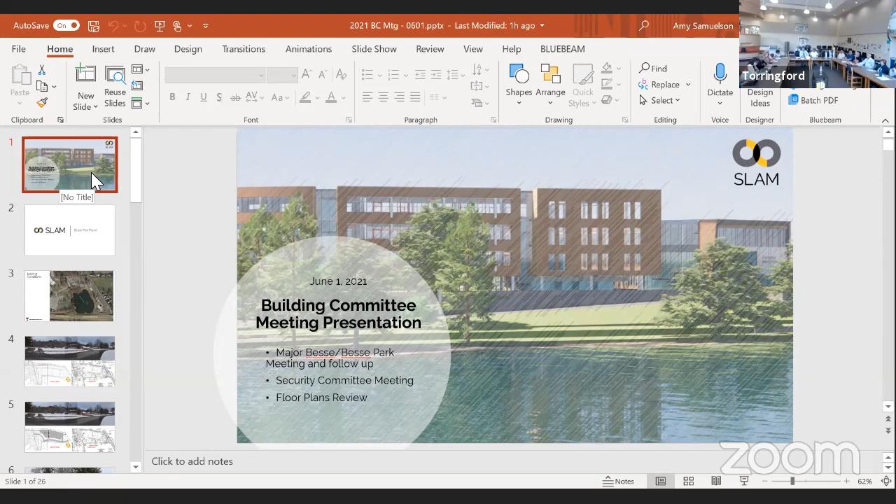One of them's playing music. Oh yeah, I have this stuck in the screen. Okay, well, let's see.

So today's agenda is to recap what we've been doing as a design team for the past couple of weeks. I believe the last time we were here, well I was remote, but Kent was here and he gave a debrief of the meeting he had with the mayor.

There has been some new information since then, and I don't know if Kemp has joined us. He's not yet, he's in limbo, trying to get into the meeting.

So I'm going to skip item 1 on my agenda. I'm going to go to the security committee meeting, and then we'll do a floor plans review, and hopefully Kemp will be in by then.

So last week we had a meeting of the security committee for this project. I'm not going to go into too much detail on decisions made - in fact we didn't really make a lot of decisions. It was mostly informative, and decisions will be forthcoming in the next few meetings. But it was a good start to understand the requirements of the SSIC.

That is a document produced by a group after the Sandy Hook tragedy in Connecticut. I say in Connecticut because it only applies to Connecticut schools. I've been to many national conferences, and I'm always surprised that there are only 2 states in the whole United States that still have security guidelines for schools.

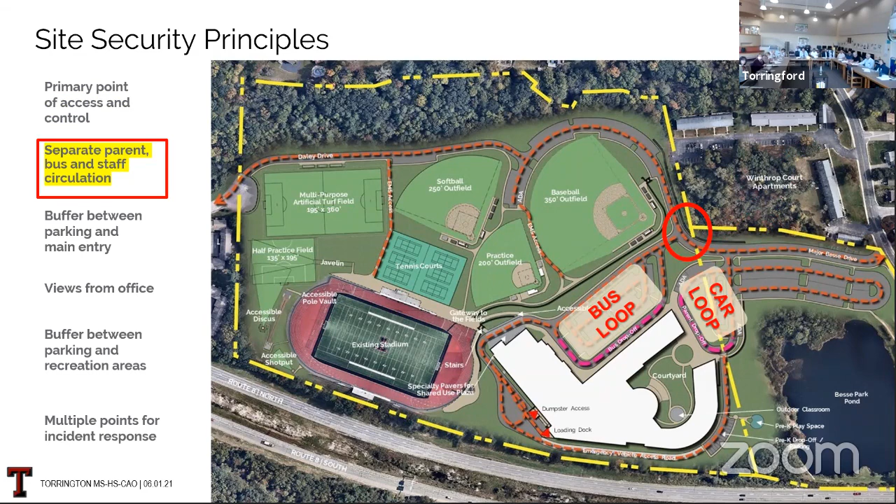Providing a buffer between the parking and the main entry is another line of defense. We haven't shown them in our renderings yet, but we'll have concrete bollards, benches, and other site plantings that will protect your entries and not allow cars to breach.

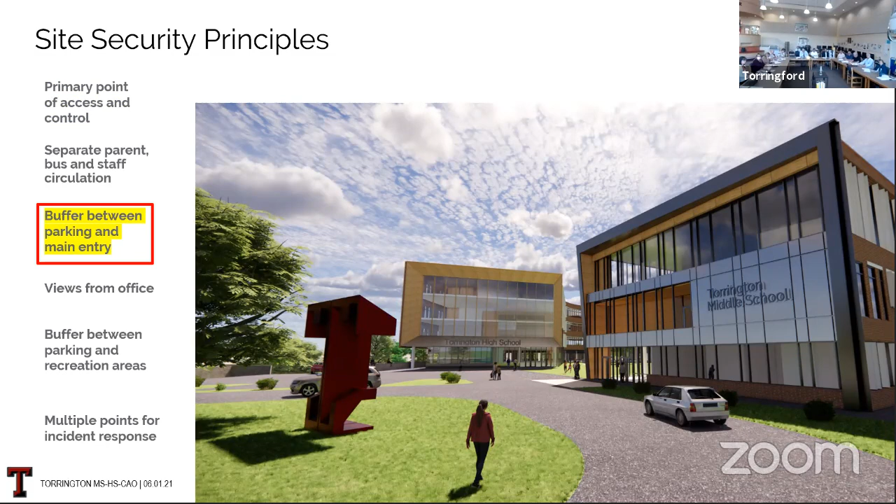That last slide, as well as this one, really demonstrates the views you'll have from the offices. The main entrances really do have all eyes on the entry from Major Besse and the parent loop, because we will not allow any parking right against the school building for a few reasons. It's a fire lane, so if any car is parked there, that's a first sign something's wrong—nobody should actually be parked there. And we'll make sure people are visible as they're walking toward the building.

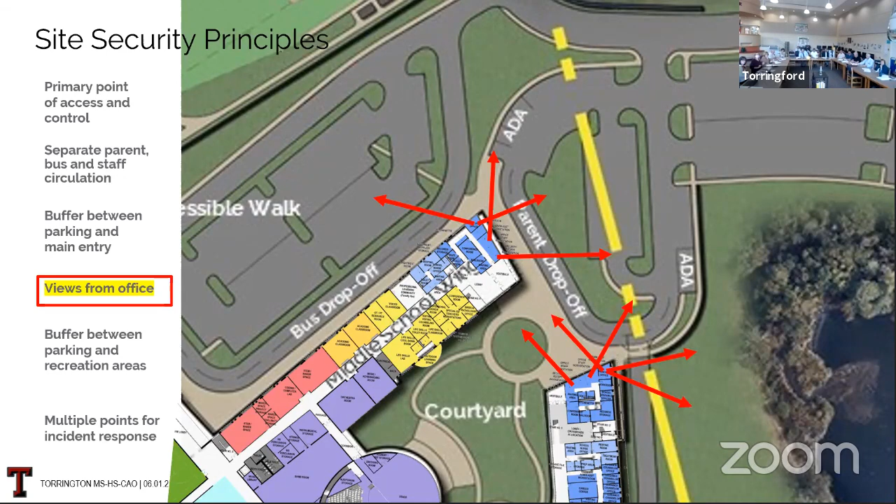There's a recommended buffer between parking and recreation areas in most cases. This is really a recommendation we're very conscientious of for our elementary school designs, so that playgrounds are not without fencing and out in front.

But in this case, we do have a retaining wall. That parking lot where the bus loop is will be below the level of the fields, just because of how your grade is on site. So those fields are sort of up where they are now and toward the back of your existing building, which is higher than where the entry is.

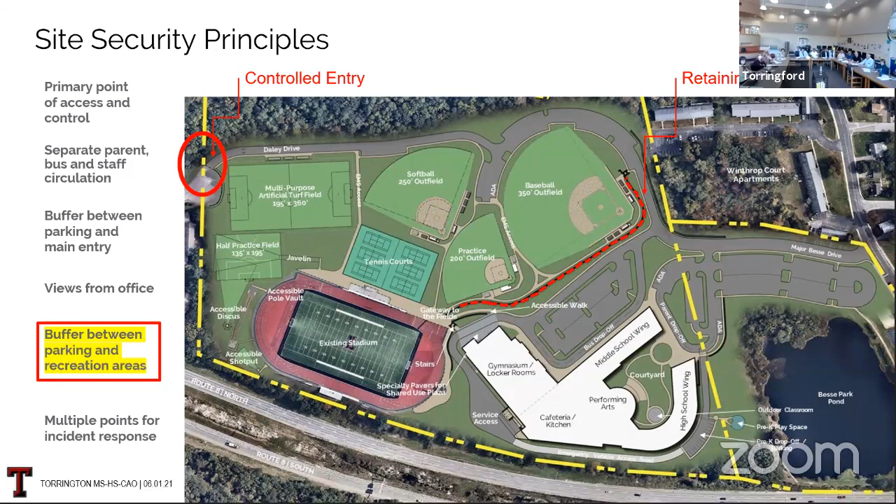We didn't talk about the extent of perimeter fencing at the security meeting, but that's another decision that will be made at that meeting, because some of your school property is already fenced. So how much of that can remain, what parts do we need to replace, and what do we need to put in new?

While it's very important to keep as few doors as possible for entry, for just controlling who's in your building—and we'll go through an entrance example in a moment—we do want to make sure there are multiple points for incident response for fire and police when they need to attend or come to the school during an incident.

So in yellow, these are what I'll call the minor doors. Those are egress doors, and they're either at the bottom of a stair or near an assembly area like that auditorium, where the public, in case of an emergency, will need to exit. Those will also be available for entrance, but only for first responders.

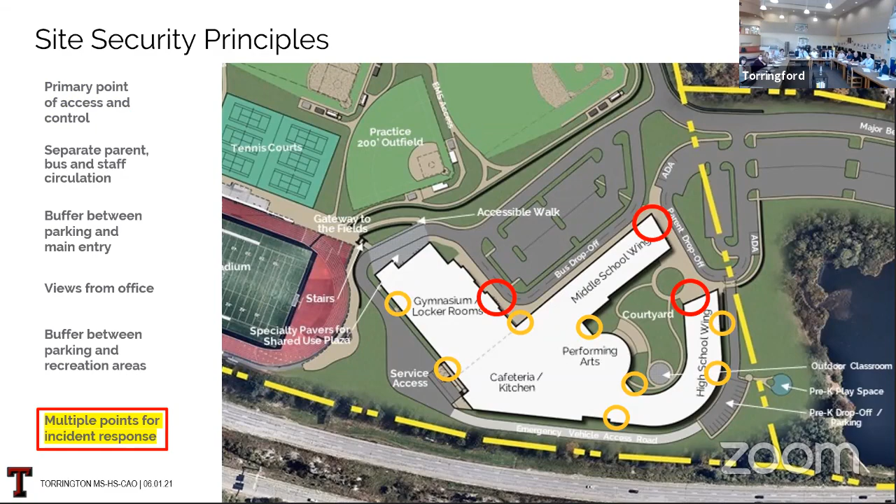This is an example of the entrance to the high school. Your middle school will have a very similar locked vestibule, so anything I say here really applies to both main entrances for this building. We're going to have this one location available for visitors during the day. The only exception is visitors will also be able to go to the central office door and be buzzed in by a different person.

Here at the school entrances, there will be a buzzer or button outside, a camera, and the person sitting in the main office will be able to see who it is and let them into this vestibule. The vestibule is still then locked, and there will be an exchange of credentials.

There's going to be a pass-through window, like a teller window, where the person manning the desk will check in with the visitor, get their ID, badge them, provide them with a lanyard—however you normally allow your visitors in, maybe it's a sticker. Then that person will be buzzed either into the building, if there's someone familiar with the building who knows exactly who they're going to meet, or the person they're meeting meets them at that door. Or they'll be buzzed into the waiting area and sit here and wait for their next meeting, or wait for their student. So it's going to be a two buzz-in approach with a credentials window.

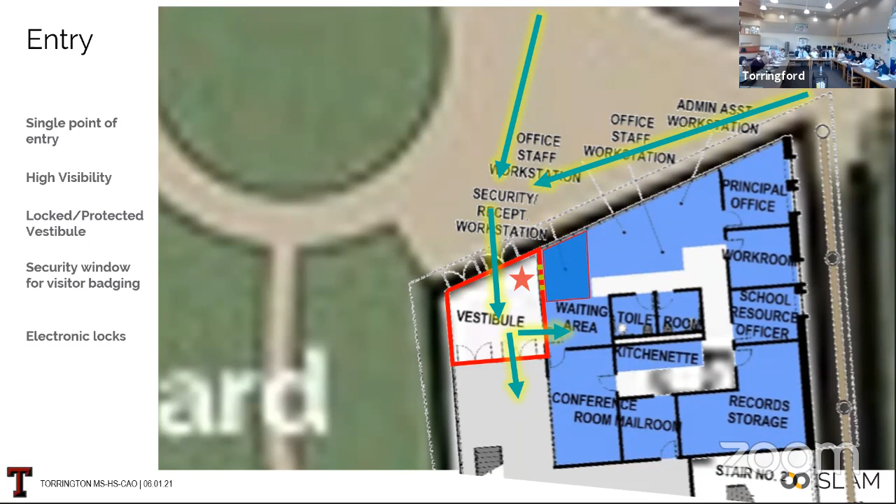We then ran through information about the security cameras and surveillance, something Allie and Ed and others are working on with our security consultant. Also, because the district would like similar facilities at each building, you're looking at a new system district-wide.

That's security cameras and access control. We also talked about card reader or fob entrance credentials, and how those can be used at multiple buildings, or perhaps first responders' key fobs to their police department could be given credentials to open a door at one of the schools, if you choose.

That will all be on a timer and able to be controlled from a computer. You can allow or not allow someone to use the door, or allow them to use it between certain hours before it gets turned off. It's all controlled, but can be set up at first to not be manual.

At certain times you might have the entrances unlocked. In the event of a basketball game, the entrance near the gymnasium might be unlocked even in the evening, or for a band concert. During the day, when buses are coming or parent drop-off is occurring, those doors will also be electronically unlocked.

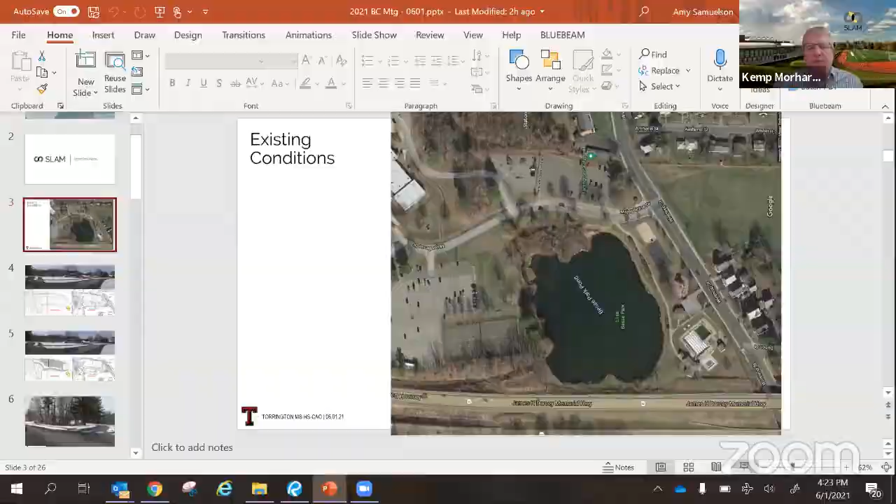Good afternoon, everyone. The developments we heard at the initial security meeting were that the police department would not support the relocation of the Major Besse Drive. That was news to us at that meeting, and I think others were a little surprised by that position, but it seems to be a firm final position from that office.

So we will have to redevelop this portion of the park to integrate the existing drive with the required parent drop-off and the drive along the east corner. We'll be working on that over the next week or two and have something to show at the next building committee meeting.

I put this photo in because I didn't have the benefit of seeing the meeting the other day, and I don't know if you ran through it at the time. When you come in, you can see by the snow in the background there is a real knob that previous iterations of the driveway must have worked around. Unfortunately, that exists sort of where we'd like to have the car parent bus loop, drop-off loop, and parking for visitors. So that's just something to contend with as we move forward and redevelop the site plan.

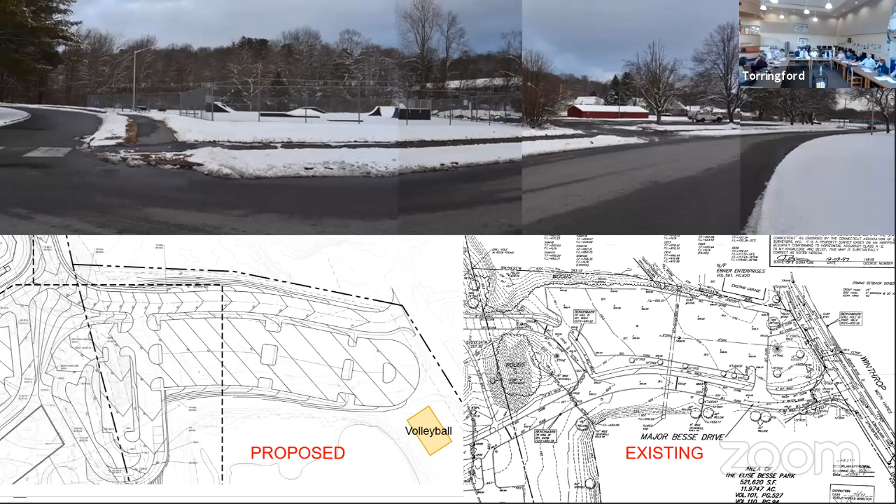The other issue was that in inclement weather, they didn't feel they'd be able to brake coming down the hill as well as they can now. That's why we asked them for their report. It was no fooling around - it was no, yeah, that was it, John.

That's enough to make me think they're not very secure about what they said. And if you listen to the makeup of that committee, it was handpicked by people who are going to tell them what they want to tell them. So I'm with Fiona, I think it smells bad.

Well, we will be doing our own traffic study as well, so we'll have a second opinion, if you will, in a few weeks. I think your traffic study is gonna be much more in depth as to what those UConn numbers are made available to. I mean, I could look those up. They're strictly just traffic counts at the stop sign. I don't think they really looked at the slope all that much.

They didn't have any plans at all to go one way, so it was a quick decision. Chief Baldwin was pretty sure what he wanted, and I'm sure the traffic enforcement officer was opposed to it right from the start.

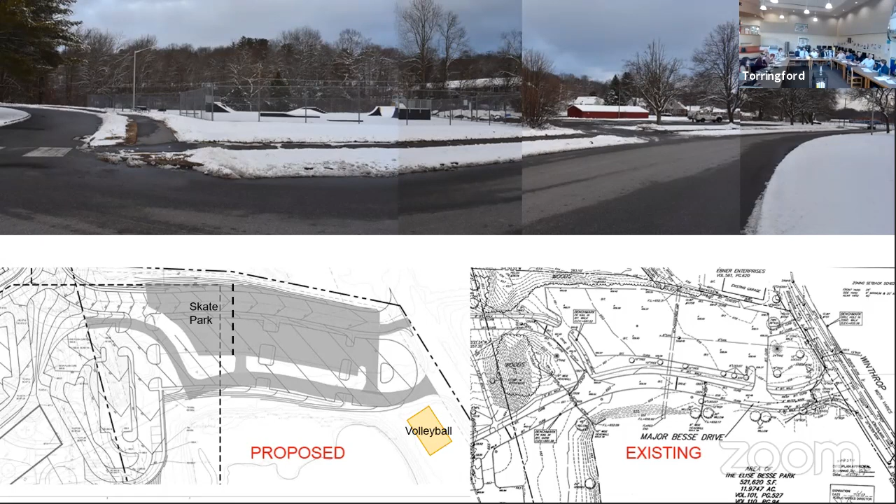I did request it. I can request it again after another week or so, just as a reminder. Yeah, I was gonna ask you if you had gotten it yet. No - great, thank you. I will also call the chief tomorrow.

So I thought we would just run through the building plans that were in the schematic design narrative, and do a little deeper dive than what we've done at other meetings with this group. Sue and Robin are sick of it now, probably - we've met so many times in recent days.

Here's a reminder of the site plan and fields layout. And then moving on to the first floor plan. Starting at the entrances, I'll run through the high school first.

At the high school entrance, there's that locked vestibule that we just discussed, and there's a main office function with a conference room and some offices. In slightly lighter blue, this is the nurses suite. And then back to that same blue color for administration, you'll see a series of offices and a suite here with its own two little entrances - that's the guidance department.

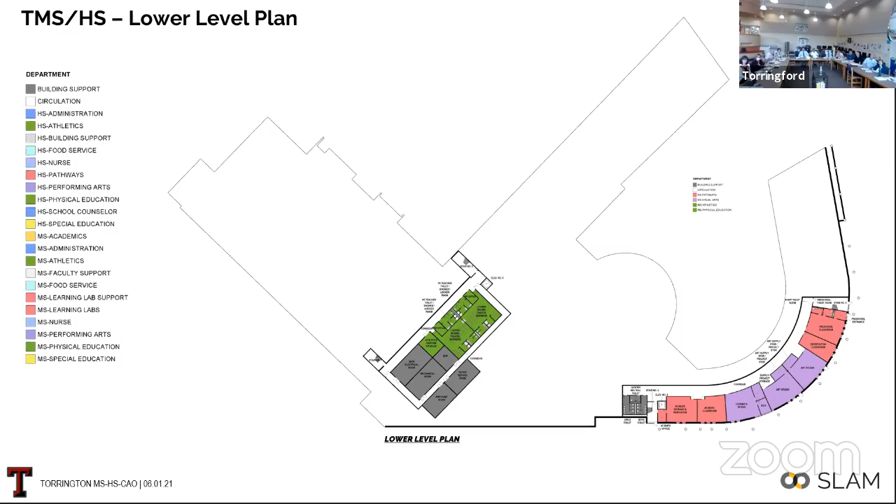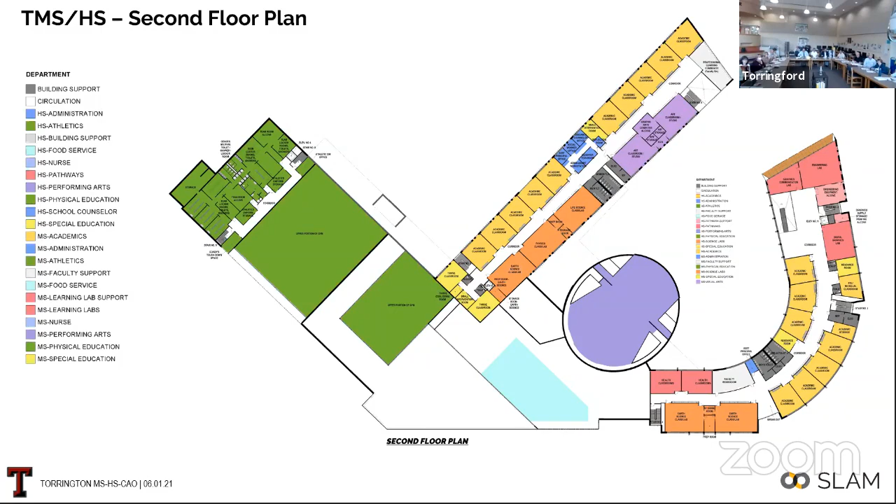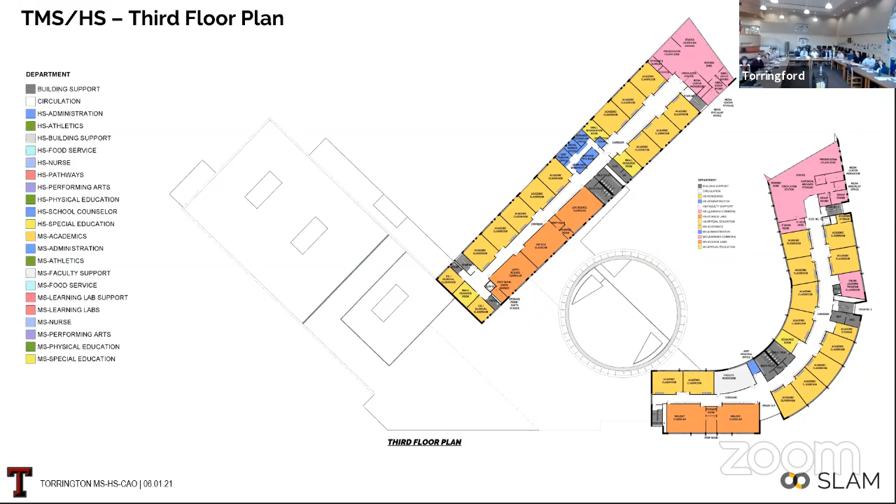I think that is all. If there are any questions about the layout, I'm happy to take them. We are in the process of really fine-tuning what's next to what.

Just curious, how many elevators are going to be in the building? Four elevators total. There are two-story elevators, 2-stop elevators we call them. One will serve the locker rooms at the high school side, and one of those 2-stop elevators just serves the lower level academic spaces on the high school side, allowing for handicap accessible access from the high school wing down to that level without going outside and parking in that separate area where the pre-K is.

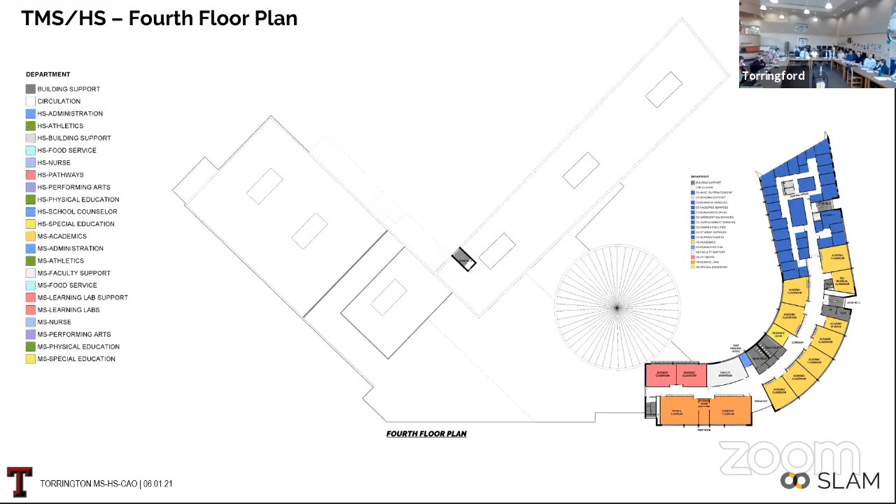Just one thing back to the site - I know I brought this up before, but now that you may be running out of parking, the cheapest parking you can put in is up against that slope, up near the fields. I don't know if you're going to use that or not, but it would be a heck of a lot cheaper than scrambling for somewhere else.

Right, and we certainly did add a lot of parking here. Correct, and if needed, if we end up with less at this end, yeah that's the cheapest I think. We don't want to have to cut into that slope if we don't have to, but the retaining wall's not that bad if it's only 4 feet. Exactly, just tow-in parking, and I think that'll get heavily used on the weekends too.

Well, that's exactly right. I actually drove up to the high school after the security meeting last week, just to, I don't know why, keep visiting. But I drove around back and it was a madhouse. I don't know what games - I know there was a softball game going on, I'm not sure what else - but just because it's such a narrow street right now with not appropriate parking, it was tough to turn around.

Any other questions?

You want to just review the coordination with the estimators today? Oh sure, so we had a couple-hour meeting this morning. The estimating team from O&G's office was on the line, and the estimating team for SLAM, which is a company called PM&C, they're doing our estimate. We all walked through the plans similar to what we just did, not really talking about what program areas are in what.

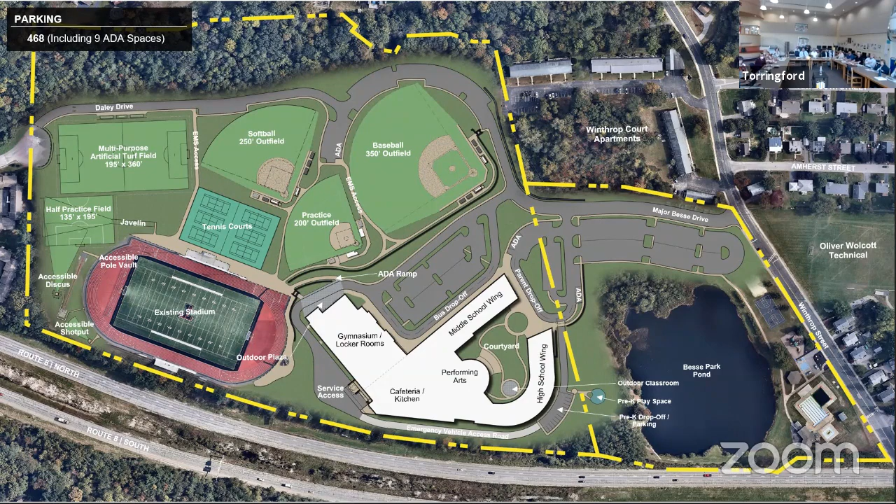That's it. Anything else for Amy? Sorry, I just have 2 questions. Do we still, this one doesn't show it, but when we're looking at the one with the 2, do we still have the ability to block off the schools from the cafeteria and gymnasium space? Yes, we'll have cross corridor doors so that...

You're right, I don't think this shows up well enough here, but after the bathrooms, but before the door to this class, and after these bathrooms, so probably somewhere in this area, we can have cross corridor doors. And depending upon how many doors we have at grade level between here and these out to the courtyard and out to the back.

We may need those doors to be what we call double egress doors, which means in case of emergency, someone has to get out, they can go through. But we'll be able to keep them in the closed position for access, so the public doesn't start wandering.

Where the high school ends, at the cafeteria, is there a door in that hallway on the right side? We have to go through this once we have the kitchen plans designed well, and the servery, because I'm not sure if it will be easiest for students to access the servery here and then come out. But yes, somewhere in here, we'll also be able to control it.

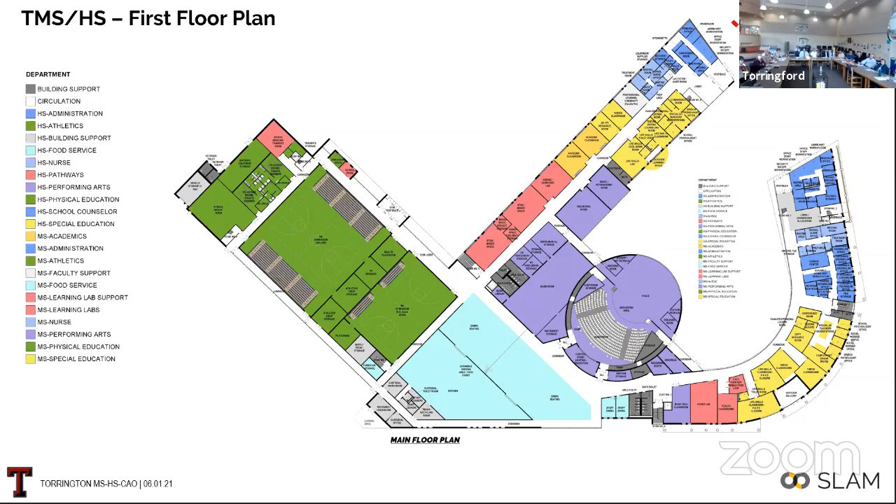Next is a payment of invoice to Construction Solutions Group for $19,534.40. It's a normal monthly payment that we approved.

Could I just have a motion to pay it? Pat? I'll second. Second, Casey. Any discussion? All in favor? Aye. Opposed?

Just to let you know, Slam's contract is going to the city council June 7th. I dropped it off at City Hall, at the city clerk's office and at the mayor's office. We just finalized O&G's contract, so we should have that for the next meeting. Pat and Casey, motion and second.

The next is Torrington Parkade. I've made calls. You have the... I don't know if it's in here?

Yeah, I make calls and emails to these guys. They don't go to the office too much. They're brokers. Exactly, yeah, actually they're developers, Gary. No, they're brokers, they're driving around brokers, throwing garbage in their back seat.

So they've both read the email, but I have not gotten a response yet. It's gonna be interesting, we'll see what they have to say.

Half the parking lot is about 150 spaces. I did go up to United Methodist Church yesterday too, to try to get out in front of that if they say no. That's about probably 150 spaces as well. It is a big parking lot. But other than that, I can't think of anywhere else we would go.